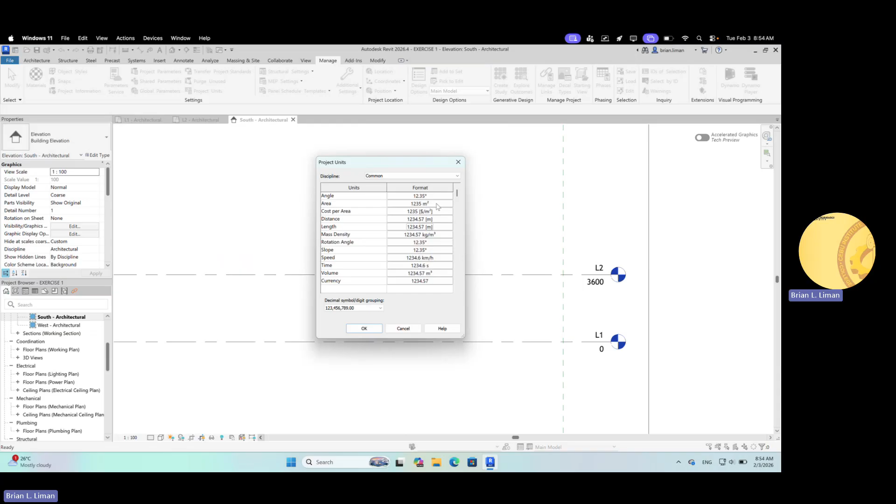Okay. So, na-change na siya. So, ito na siyang i-okay class. So, as we change the units, here we can see the update set. It's now 3.6 meters instead of the 3,600 value. Okay?

Now, when you start a project, it's important to set the levels first. Muna siya ang importante. Okay? So, na naman tayo level 1. That's 0. So, we'll start with a one-story structure. So, in one-story structure, ang pinaka-lowest mo na siya ang set to be designated as NGL. So, that's 0.

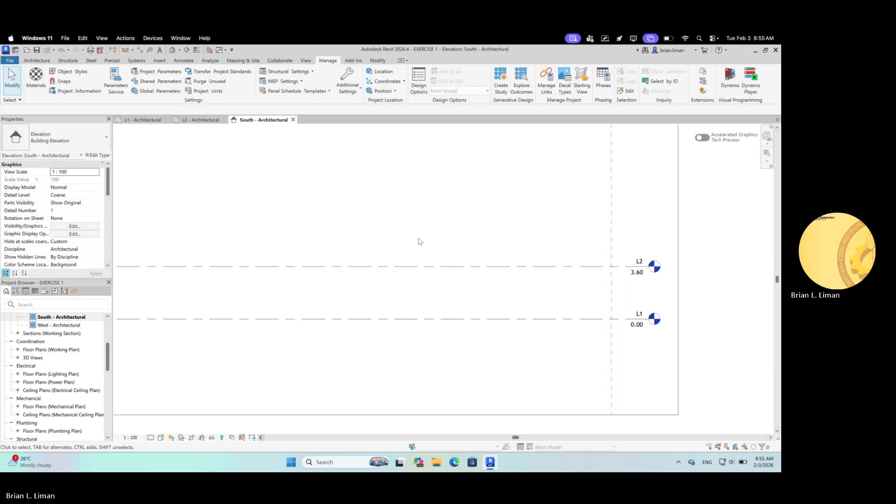Ang next is FFL, finished floor line. And then, ang utanganan sa truss, that's the top of RB, top of roof beam. Or kung kahoy, top of girth. Okay? Ang babawa na sa atop, that's the top of roof. So, meaning, need taog additional level here. Then, we'll make another level above sa L2.

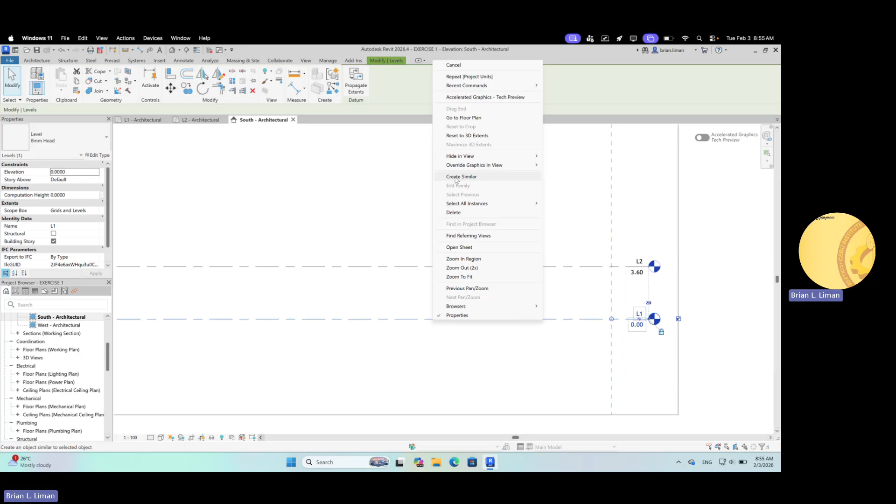So, what you will do is select that one, L1, then right-click, create similar. So, try it, class. Here lang, somewhere here. Then, you click and then over on the right side, position that, align siya sa others, more or less. Click. Okay, so you create that one.

So the tool is still active, as shown. Active pa na siya. If you want to end the tool being active, i-escape lang na siya. Kung wa pa na escape, continue na, click ka diri, and then click. Kung na-escape, the same gapon.

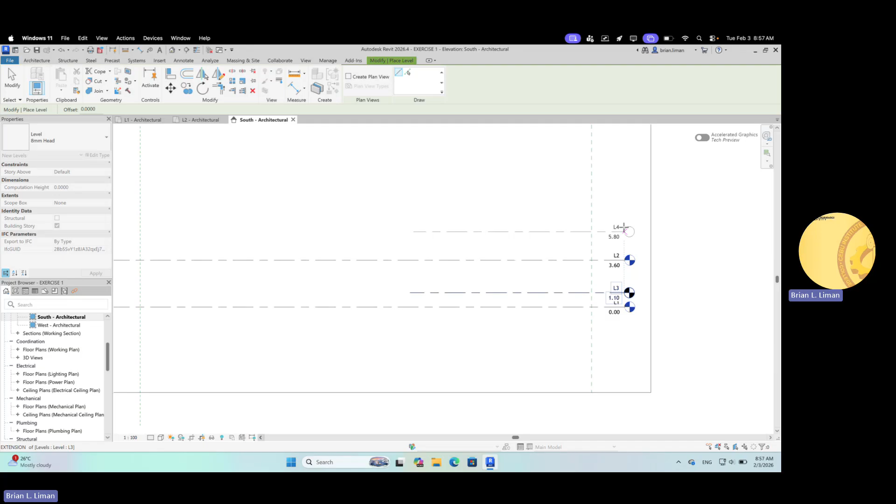You click one level, right-click, create similar, then on top of level 2, click the first point, and then over on the right side. Position, more or less, it will align. And nice thing with Revit is it will inform you nga na-align. Siya yung reference. So clicking na lang ka. Left click. Then press escape twice.

So what's the difference, class? Ang original levels, first levels, sa may color. Ang bago, black siya. So if we look at the project browser, sa floor plans, naa L1 and L2. L1 is pertaining to this one, 0. So meaning, ang present in our project browser are the L1 and L2. Although we have created new levels, wala siya mo-appear. Okay? So ato na siyang ipa-appear.

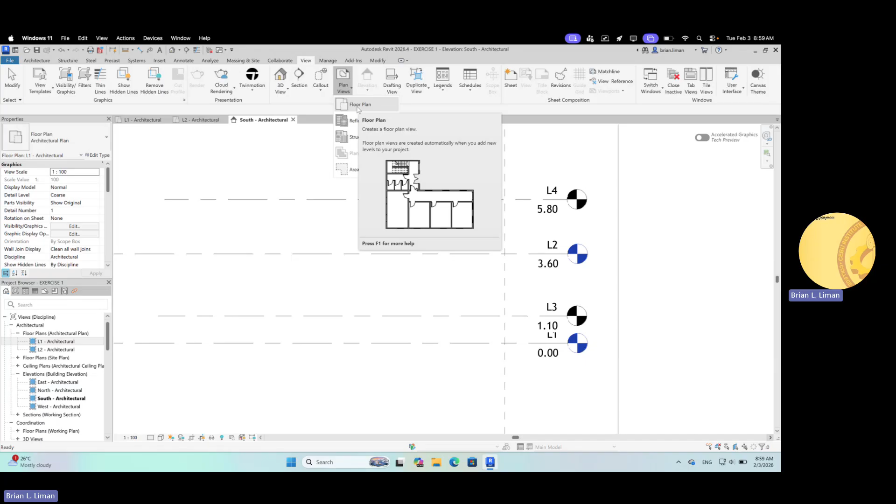So asa man tana siya? Arita sa View. Then you go to Plan Views. Then floor plan. Views, katong menu nasa babaw. Then Plan Views, just below. Then click Floor Plan. You can see L3 and L4.

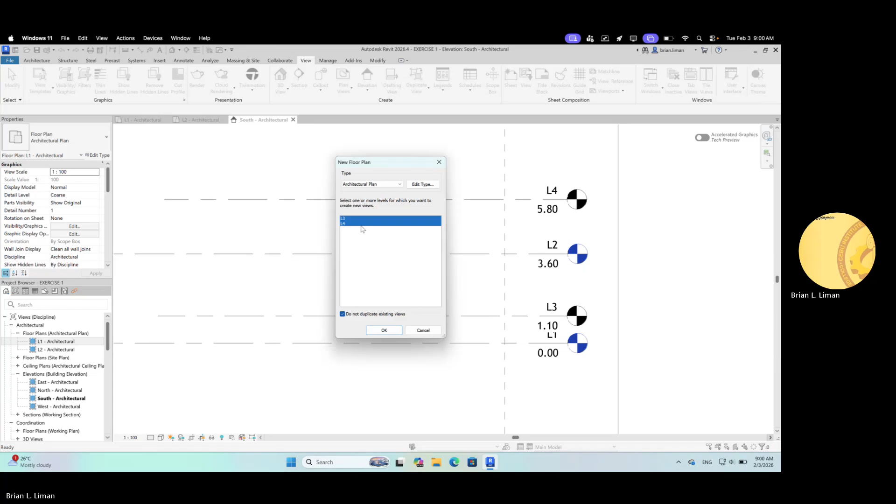So, para ma-select ang L3 and L4, i-hold lang ang shift and then select L4. But actually, pwede ra, if you want L3 ra makita, then L3. But we want the two floor plan views nga ma-add dito sa browser. So, shift lang, then select. Then, okay. So, what happens, class? We can now see the levels L3 and L4.

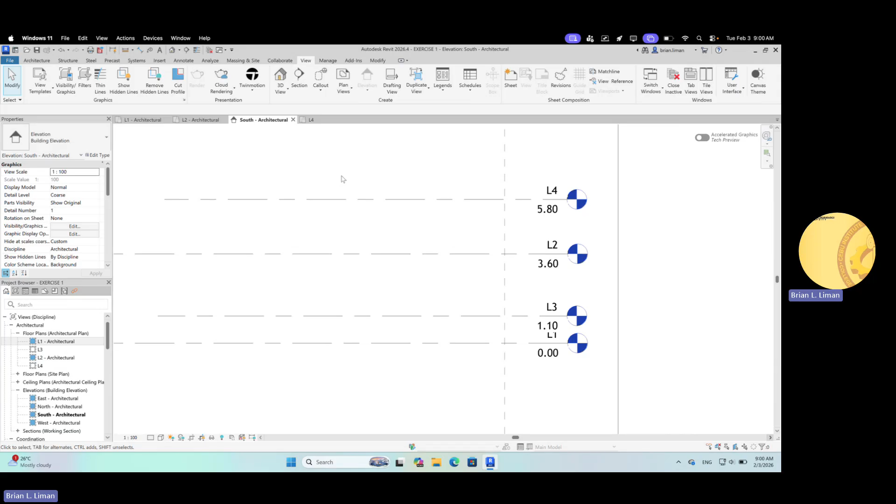So, we're going to check sa elevation, sa tab, South Architectural, pwede ka diri click, pwede ka diri sa browser. Okay? So, we have the levels na, all levels, L1 to L4. So, next is, we're going to change the names of the levels. Like L1, ato nang i-NGL.

So, renaming, class, pwede mo diri. So, right-click on that. Then, atong i-rename. NGL.

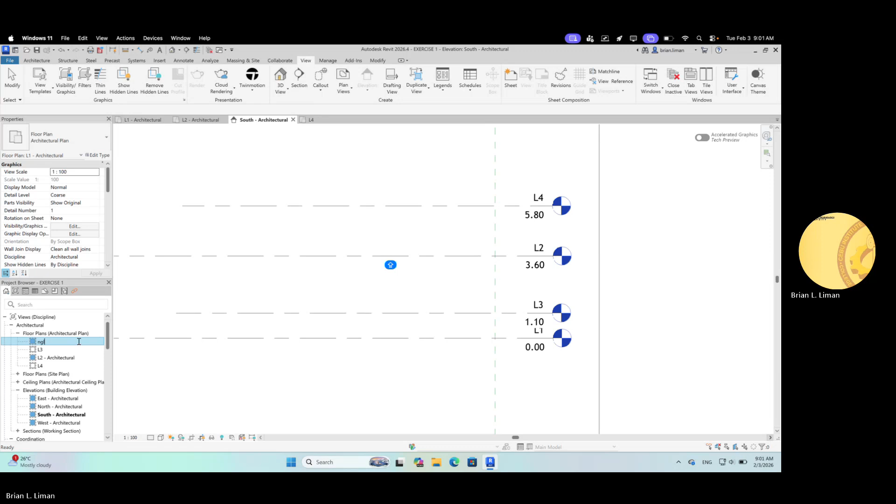Now, if dili siya mo automatically update diri, then you click on the text lang. Dali raman siya, then rename. So, ito lang unahon diri, class, sa elevation. Like L3, click on that. I-shortcut lang nato, FFL. But you can write the full, finished floor line. Yes na siya, para ma-update dito sa project view. So, mas nice dire kay automatic.

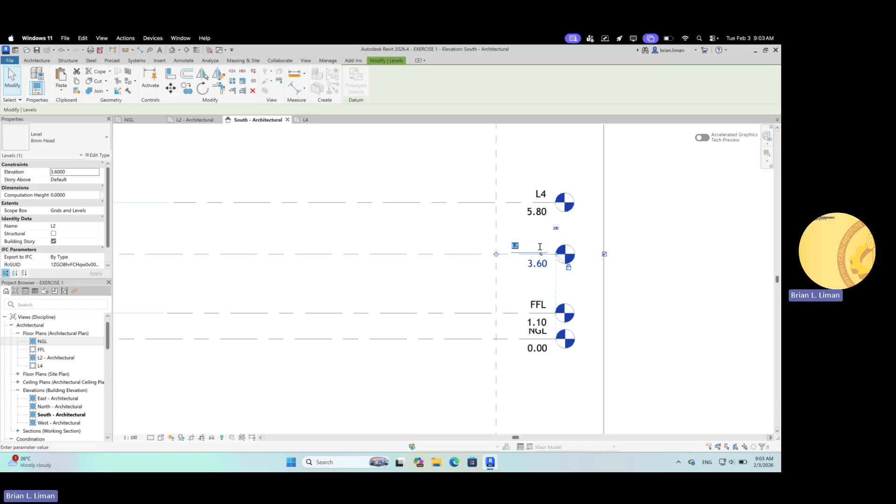Okay? Arita sa L2. Again, you click on the text. Then, top of RB. Then, top of roof. Yes na lang para the views under project browser ma-update siya.

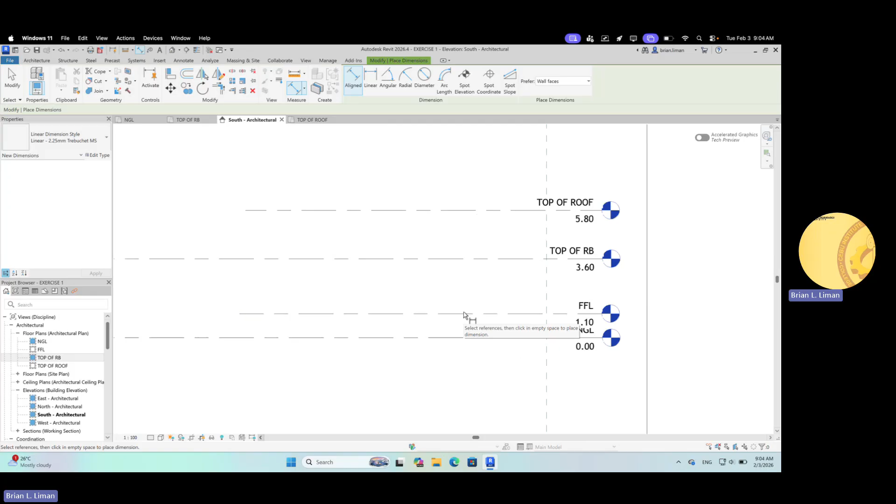So, we have NGL, finished floor line, top of RB, top of roof. Okay. So, we're going to change the distances. Importante man na siya. So, you type DI. Okay? DI ta class para we will have the functions dayon sa measuring. So, align. Clicking lang ta class. Click lang ka ni. Click the levels. Click. Click.

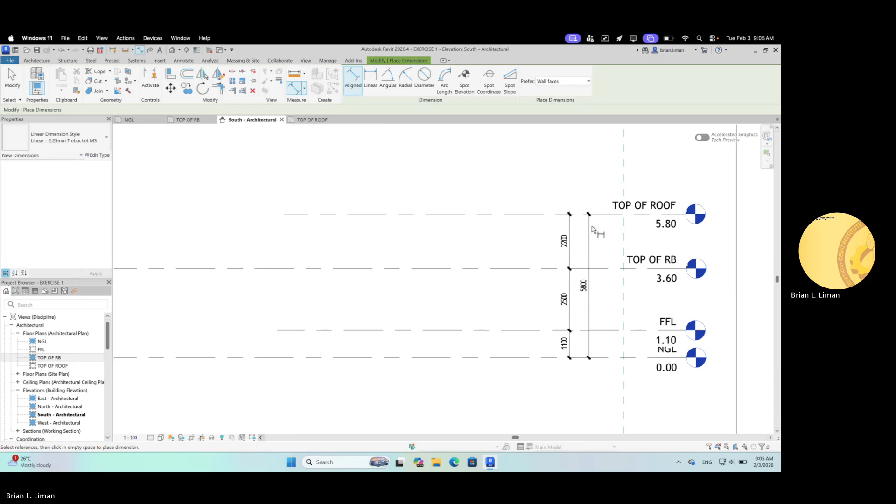Okay? So, balik ko na ko klasa. You type DI for dimension. So, that's aligned and activated. So, these are the levels. Clicking lang dyan ka sa levels. Click, click, tarong nga click. Wata nga mo activate or ma-highlight ang level line. Click, then click, then click, then the right. Okay, kuha. Then escape. Then escape again, to end the tool.

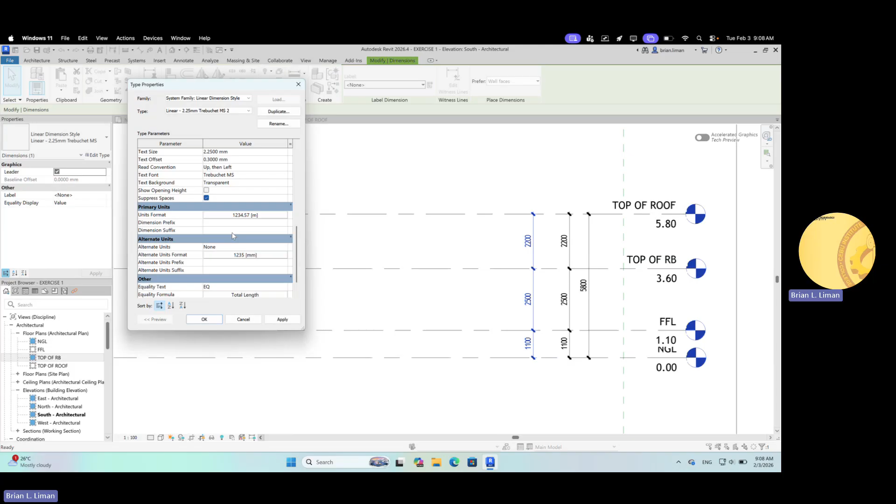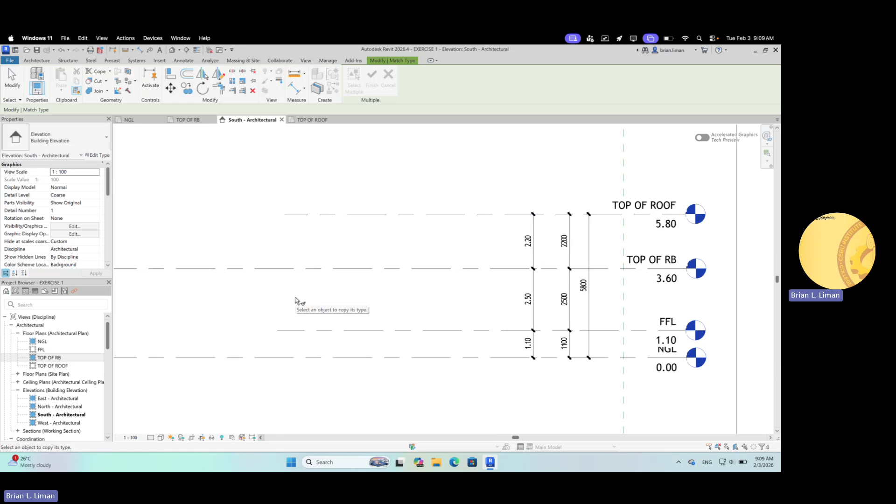So, escape, escape. Now, we want this dimension mo pareha. Or rather, this setup being meters, mapareha aning existing. So, just like CAD, MA lang. Match properties, MA. So, click, then source, destination, click, then click, then escape, escape. So, pareha na.

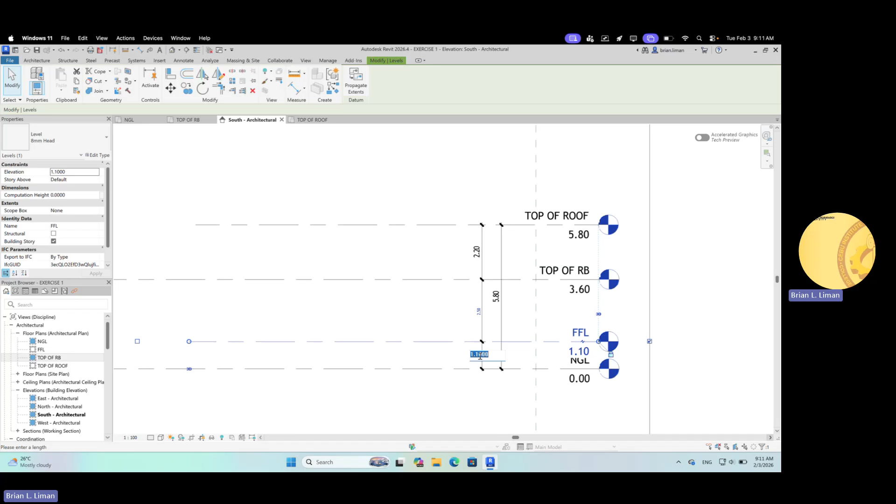So unsaon man na siya class, what you're going to do is you click on the dimension lang. Hover on the text, sa pinakaubos. Click on that. Type 0.3. Then enter. Musos na siya. Okay? Arita sa next. Hover on the text.

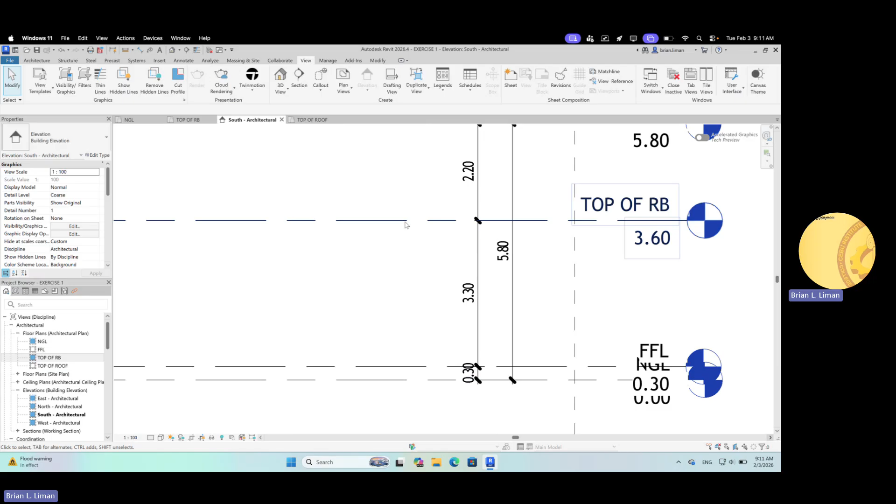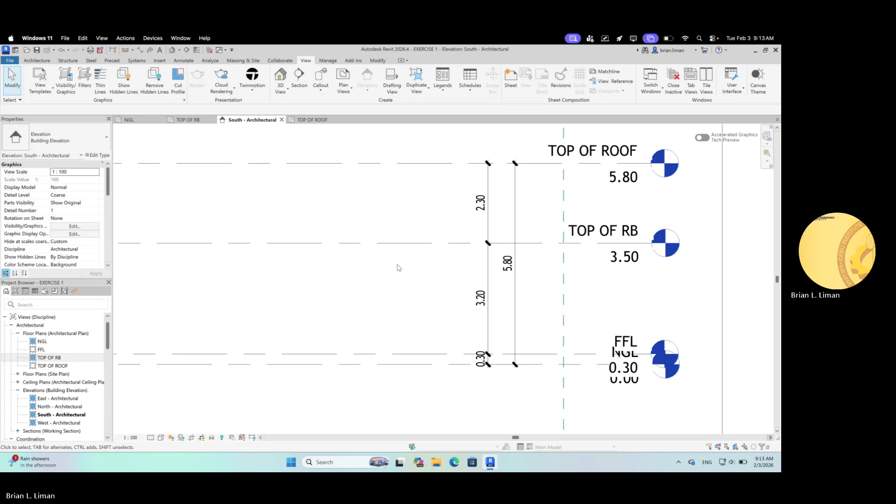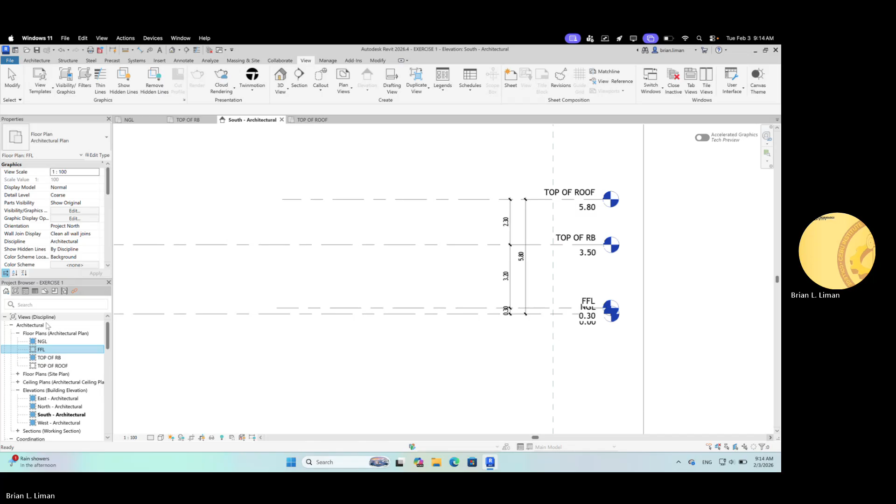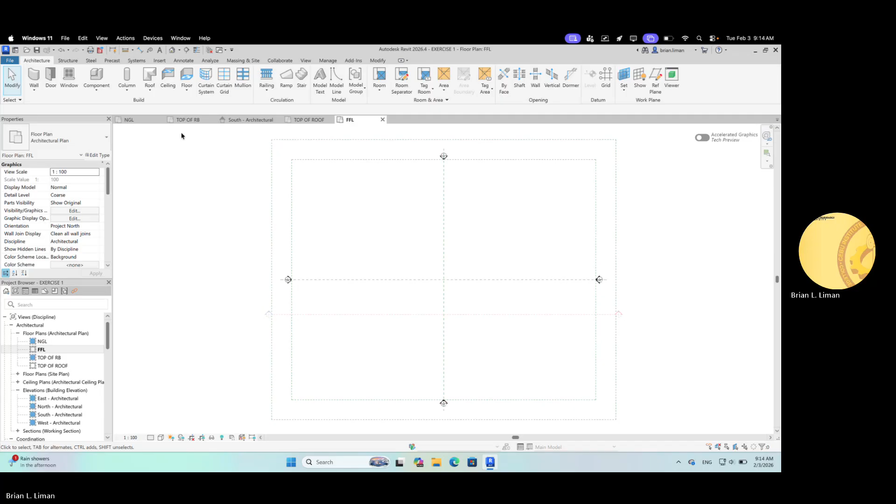So, ari na ta sa finish floor line. Finish floor line. So, we'll try the basic elements. Okay? Pero para at least makakuha forma na ta something. So, we'll start with the wall. Okay? So, asa maning wall? Na dire class architecture, then click lang ka sa wall. Pwede ra pod ka mo type og WA for wall.

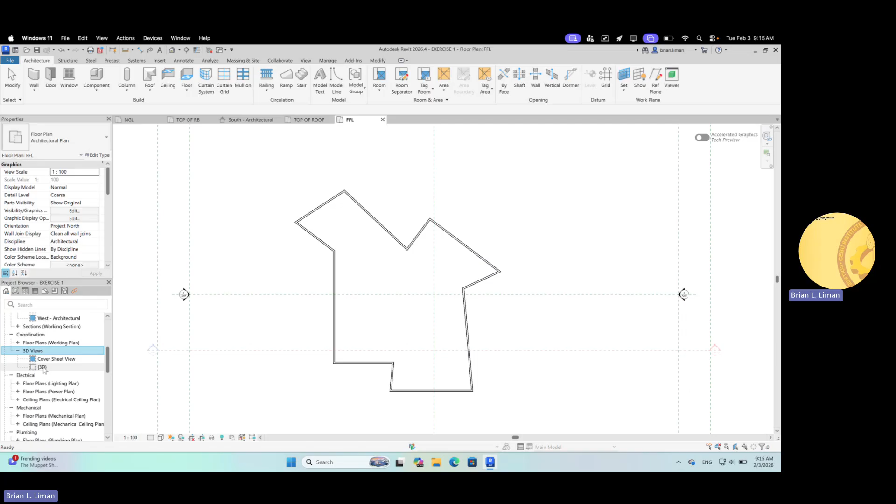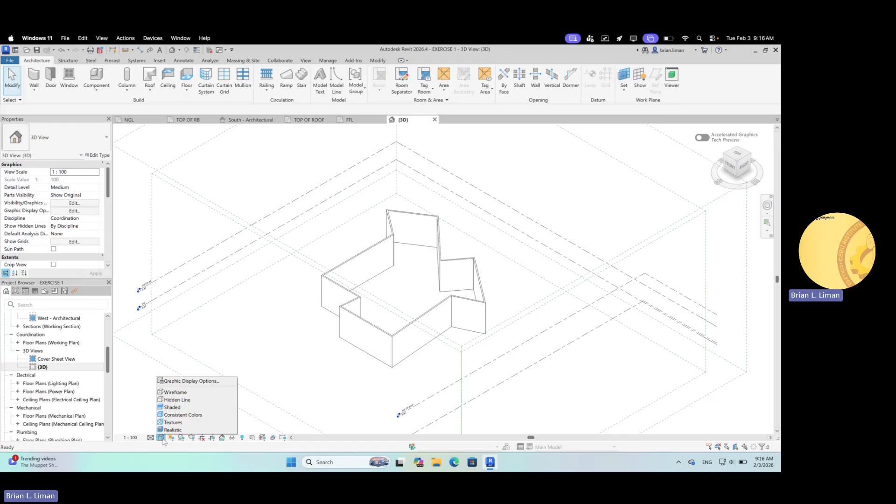Now, if you like shade mode, naroon na sa bottom class. Kanang tapad na na-checkered. Okay? You like shaded, consistent colors lang, para at least ma-appreciate nimo na siya. 3D na.

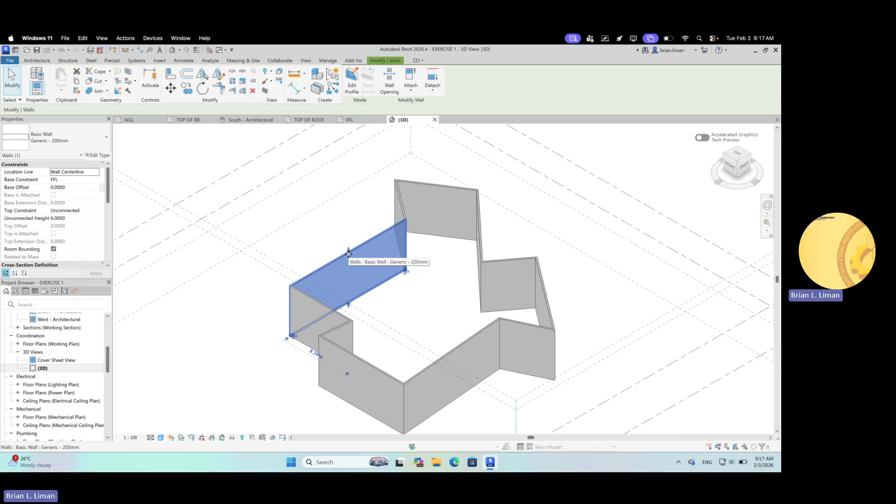We're going to make a wall, no? Mag-designate tag wall with our desired thickness. So, ako na siyang i-close sa escape. So, ito na siya i-select. Okay? Wall. Ito na siyang i-edit type. Then, duplicate. Okay? So, example, wall 1. Wall 1, 150 mm. Yeah, okay.

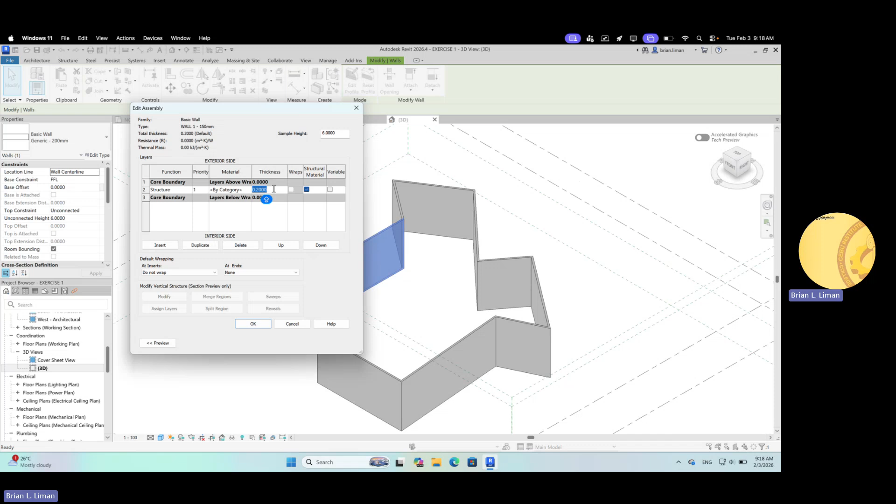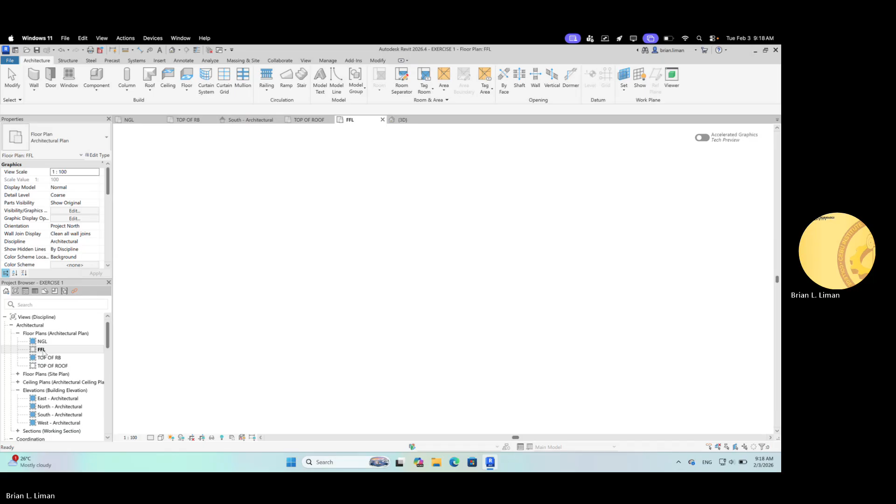Okay, balik ta sa plan view. Arita sa FFL. Okay? So if you look at that, mas niwang siya kaysa previous. So ato na siyang i-delete ang kuan. So you type WA class, that's shortcut for wall. You can also go here, architecture, then click the tool wall or type WA.

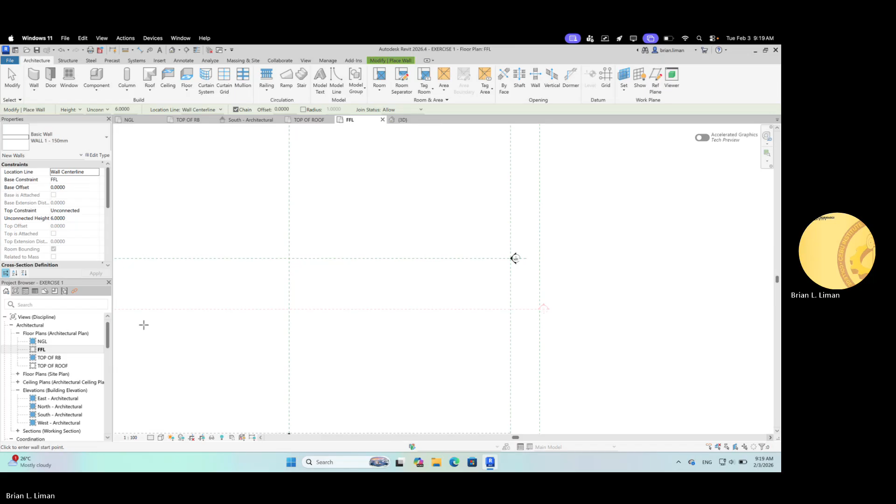Then let's say you start and then you type 10. Then arita sa horizontal, 15. That's pertaining to meters. Then 10. Then to the left, point of origin. Click on that, then enter. Or escape, no? Escape to end the command.